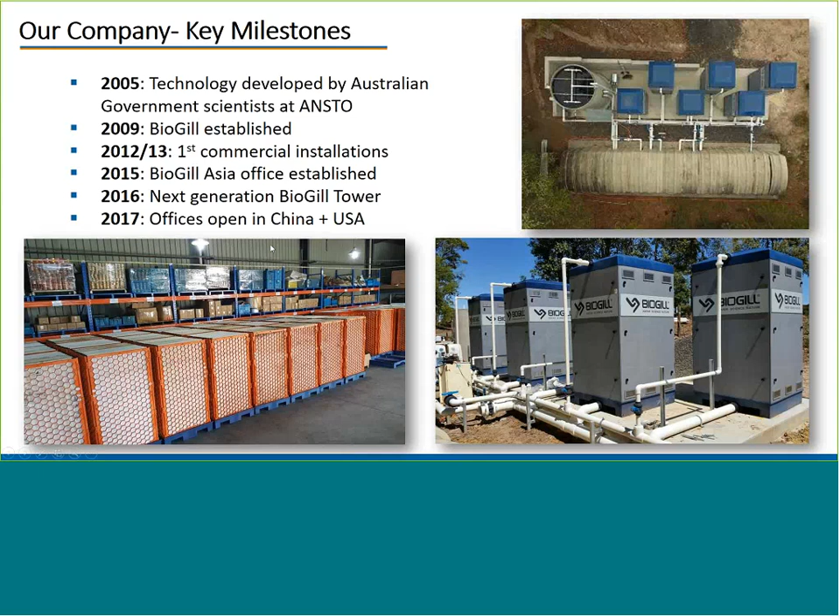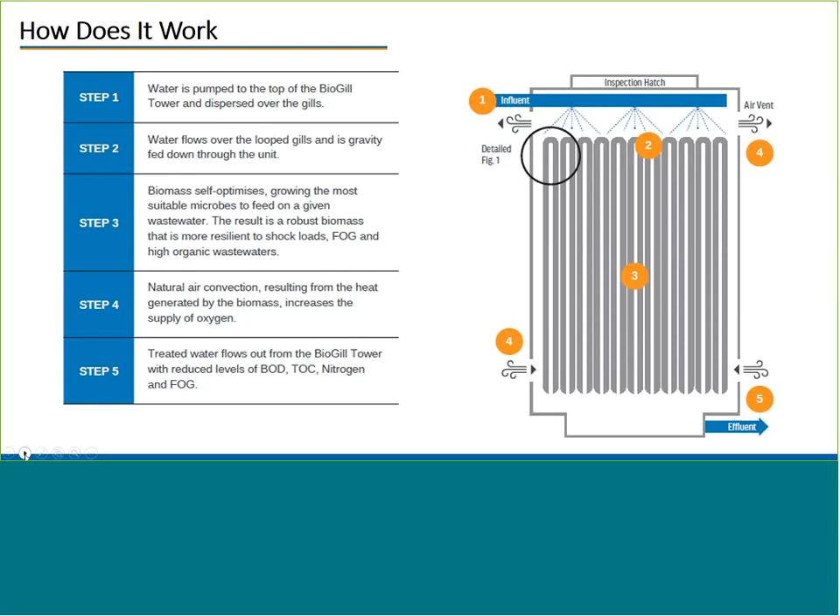So this gill is a sheet of fabric going over a support structure, a rod, if you will, and water flows down where the gills come close to each other, and then there's an air interior which is kept open by a minimal structure.

From the air side through to the water side, you get a consortia of biological organisms, ranging in some cases from funguses to anoxic or heterotrophs on the water side. Thus, we get a wide range and a wide variety of organisms that can address our treatment needs.

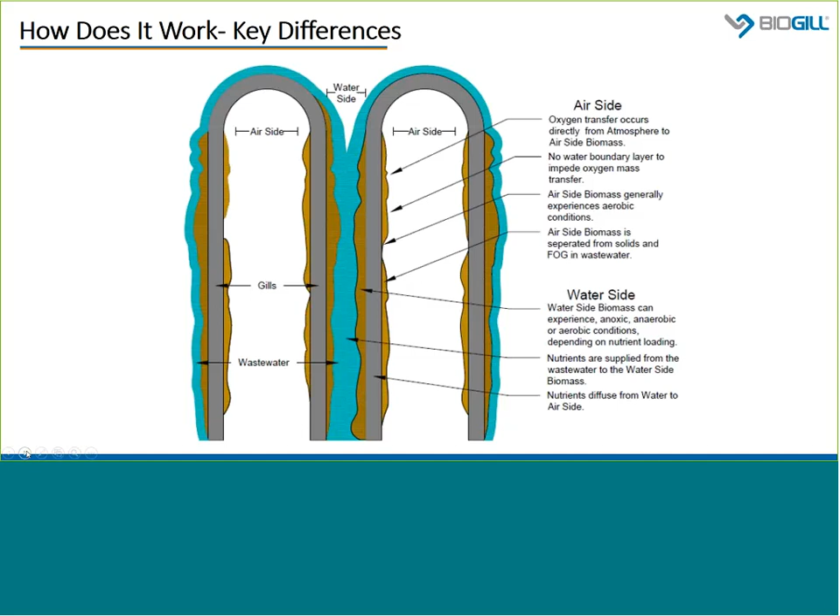So in this case, we have water on one side with nutrients supplying the consortia through the membrane. The membrane does not pass water, it's wetted. The membrane passes oxygen. That's a confusion that some people have had with our technology when we call it a membrane. They're thinking it's a water filtration device. It is not. On the next slide, we can see how this is put together.

In this installation, you see the small pipe going up to the blue lid where water is fed in over a distribution system that's hidden. It flows down and goes out the large pipe at the bottom. And then you can see the vents on the bottom where air is drawn in and air is expelled. There are no pumps. It happens by convection.

And in the case of high BOD loads, you know this is working because you can actually feel warm air being pushed out the top vents if you put your hand there. That's a good test for operators when they're walking around doing their weekly inspections.

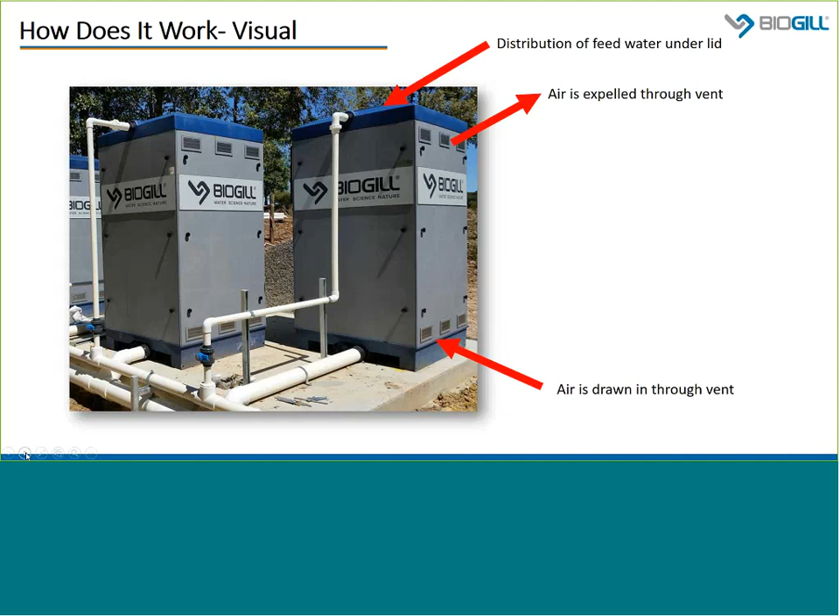So on the next slide, we'll see how it's put together as a system, not unlike any wastewater treatment system. In this case, it was a projection model we did for a brewery, where the daily flow was 4,000 gallons per day at about 3,500 milligrams per liter BOD, followed by some screening or primary treatment capability. In this case, it was a density-based method, into an equalization tank where pH is corrected, and then through 2 stages of BioGill towers and recirculation tanks.

Finally, discharging through tertiary treatment as required by the local authorities, and then to an effluent. Most of our clients are looking for about a 90% reduction in BOD, or sometimes to get below 300 milligrams per liter BOD, as was in this case.

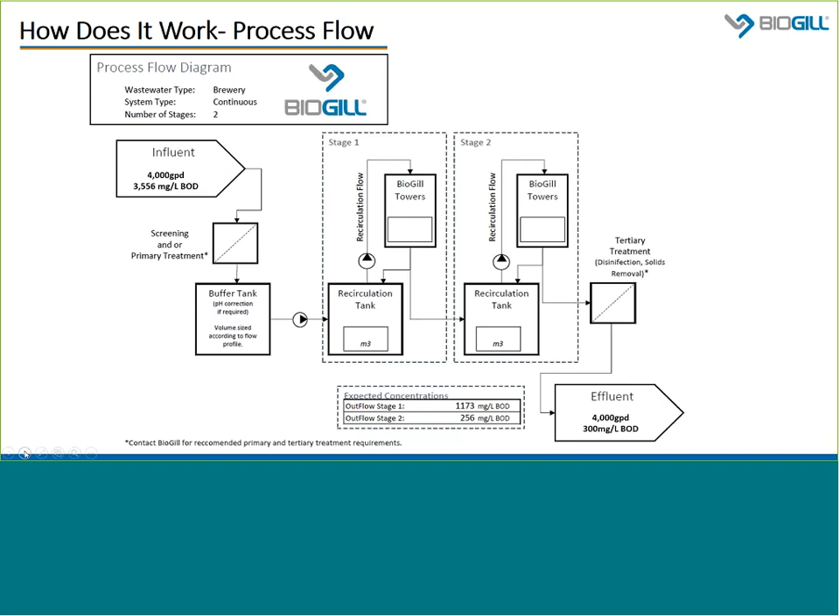On the next slide, it's just a combination of what others have told us in terms of how this technology is unique. First of all, it's simple to install and easy to operate. You can see from those pictures, it's towers, it's PVC pipes, and gravity flow, and a few pumps to recirculate and feed. It's easy to maintain. Maybe once a month, an operator opens up the lid and with a garden hose sprays off any accumulated solids.

As a tower in and of itself, it's modular and scalable. And because it's an attached growth process, it has a low sludge output, not unlike that of many other attached growth processes, but we're seeing sludge yields of about 1 pound of sludge for every 3 pounds of BOD.

And as I mentioned in the first slide, you have both aerobic on the air side and anaerobic or anoxic treatment in the same pass. And this broad consortium of bacteria or fungus give you a high intensity and a high rate of treatment for a BioGill tower.

They're used to boost the performance of existing plants as a roughing filter or just to add existing capacity. Of course, they're used for effective and rapid treatment of high-strength soluble BOD. As an attached growth process, we find they're resistant to shock loads and high organic strength waste streams. And this is important for industrial operations where they may not be operating at night or on the weekends, but turn the flow up and turn the BOD up during the day. And so we go through a feast and famine cycle, which is normal for BioGill type treatment operations.

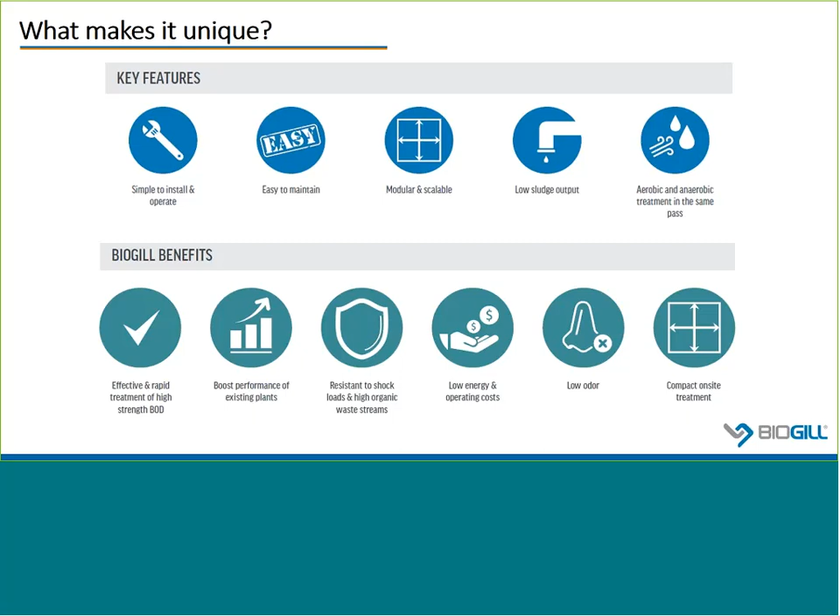Thanks, Steve. First, we'll talk about the BioGill tower. The tower is the original BioGill product, and it was designed for simple, user-friendly installation, maintenance, and operation. The tower has been operating commercially for the past 6 years now, with the number installed now in the hundreds. During that time, we've continued to make improvements to the product, making it even easier to install and operate.

The tower is able to handle a range of treatment requirements, and the design flow rate per tower varies depending on influent loading, wastewater temperature, and treatment levels required. For sewage applications, the flow rate per tower is approximately 2,600 gallons per day for applications needing to achieve 90% BOD removal. For high-strength waste applications, over 22 pounds per day of BOD can be removed per tower. Multiple towers can also be combined in parallel or in series to meet a range of flow and treatment requirements.

The Ultra consists of a 20-foot containerized system with 10 BioGill reactor cores inside, arranged in dual treatment trains for ease of maintenance. The Ultra was developed in order to offer a true plug-and-play secondary treatment solution capable of handling higher flows. Recirculation tanks are built into the unit, and options also include an attached control skid with PLC, recirculation pumps, and an automated self-cleaning option with air scouring, which reduces operator maintenance requirements even further.

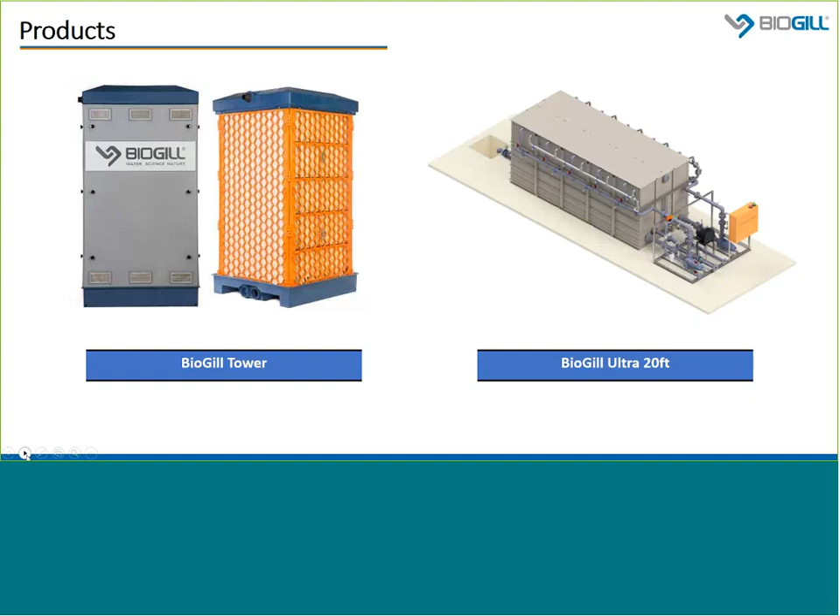Like the tower, Ultra units can be combined to meet a range of flow and treatment needs, and flow rates per Ultra depend on influent loading, wastewater temperature, and BOD reduction requirements. For sewage applications, each Ultra can treat over 20,000 gallons per day to achieve 90% BOD reduction. For high-strength waste applications, 90% BOD removal can be achieved with flows of about 5,200 to 8,000 gallons per day per Ultra.

Operating guidelines for BioGill systems are pretty simple and consistent with those for other biological treatment processes. BioGill is designed primarily for the removal of soluble organics, so process design should include an upstream screening or settling step to remove the larger particles above about 1 to 3 millimeters in size, and influent TSS should be reduced to about 300 milligrams per liter or lower before water enters the BioGill.

Influent temperatures are optimally above 65 degrees Fahrenheit, as colder temperatures impede biological growth and metabolism. For colder climates, many BioGill systems have been located inside insulated structures. pH entering the BioGill should ideally be in the neutral range, but one of the benefits of the BioGill system is that we found it to be very highly resilient to shock loads or to startup conditions that may fall temporarily outside of this range. The system recovers very quickly.

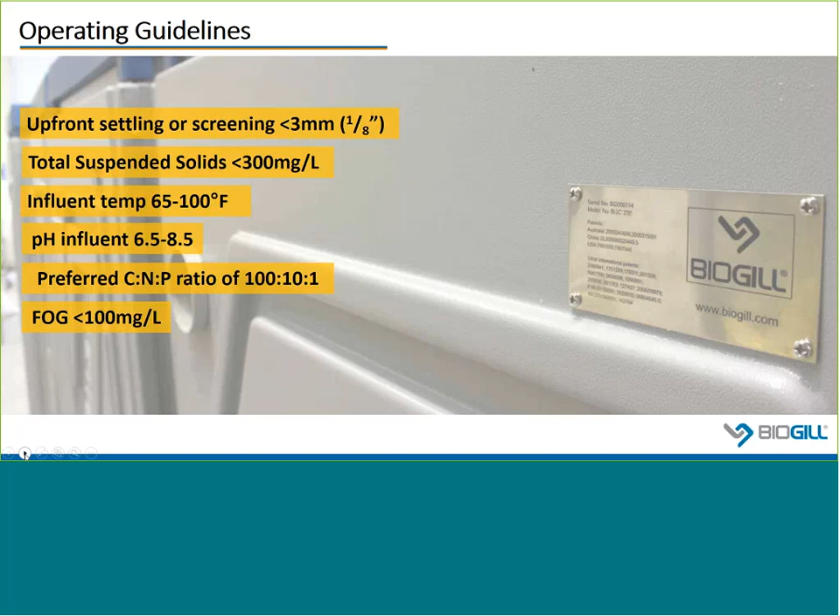Preferred nutrient ratios are typical of other biological treatment systems, and BioGill can also handle fats, oils, and greases, ideally at levels below 100 milligrams per liter. One of the real sweet spots for BioGill systems is food and beverage applications for small to mid-sized facilities with high soluble organic loading. We have a wide range of experience with a variety of applications in the food and beverage market, ranging from wineries to breweries, confectionaries, meat processing facilities, fruit and vegetable processing, and dairy wastewater. We've won awards in particular for high sugar and winery wastewater projects.

We really see a niche for BioGill in the craft brewery and winery market, given the simplicity and low operation and maintenance costs associated with the system compared to other technologies. The BioGill Tower and Ultra are also designed to make it quite simple for the system to be scaled, allowing the wastewater treatment system to grow with industrial customers to expand their operations and increase production. Key drivers for many of our client sites are to achieve regulatory compliance and reduce the cost of high-strength surcharges, especially those who are discharging to sewer and paying per pound of BOD, and those paying for wastewater hauling fees if wastewater is being hauled off-site.

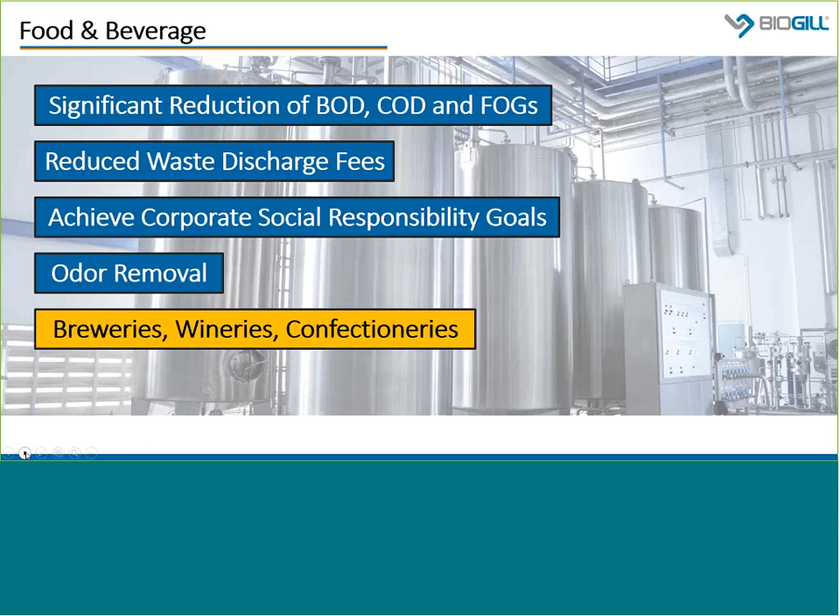BioGill is an ideal solution for food and beverage facilities who haven't previously had on-site wastewater treatment because the system is so simple to operate and therefore not disruptive to day-to-day operations. These are customers busy making their beer or their wine who don't have a lot of time or resources to divert to wastewater treatment. In North America, we currently have a full-scale installation at a winery in Canada, and we have a pilot system currently running at a craft brewery in New Hampshire. We also have additional case studies and full technical reports available if anyone is interested.

BioGill also has experience in a variety of sewage applications. The modular above-ground nature of the system makes it quite well suited for decentralized sewage applications or for adding capacity to existing overloaded or aging systems, such as overloaded septic systems, or for retrofitting something like a poorly performing rotating biological contactor while making effective reuse of existing tankage.

A major advantage of the BioGill system is that it is robust and highly forgiving, both to fluctuating loads or to periods of operator inattention. It's a great fit for sites like seasonal resorts or golf courses that might see swings in loadings over the course of the week or the year. One system was restarted this spring after a 5-month winter shutdown and was achieving full treatment again after just 4 days. In other situations, we've seen startup occur in less than 24 hours.

The limited maintenance requirements and simplicity of operation also make BioGill a great option for facilities that might not have a full-time wastewater operator or the capacity to manage a complex treatment system. We have a number of case studies and technical reports available detailing these sewage applications and others if you're interested in more information.

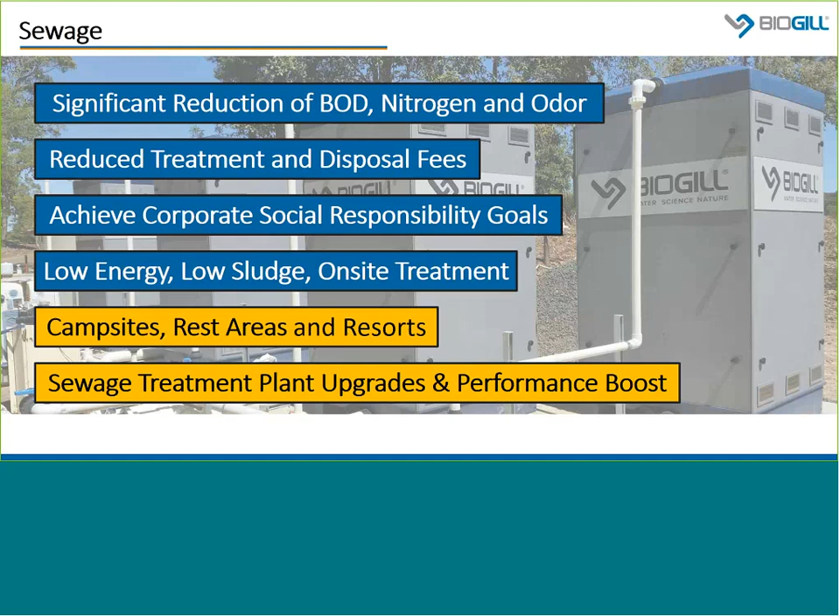So this brings us to the end of the introduction to BioGill. Key takeaways are that the system is extremely simple both to install, operate, and maintain, reducing lifetime system and personnel costs. It's also a proven technology, installed worldwide, able to achieve effective treatment, especially for low-flow, high-BOD waste streams.

BioGill is also designed to be scalable and modular, meaning that the system can be expanded to meet changing facility needs, a major advantage for industrial facilities increasing production, or sewage applications needing to grow to serve additional population or increases in tourism.